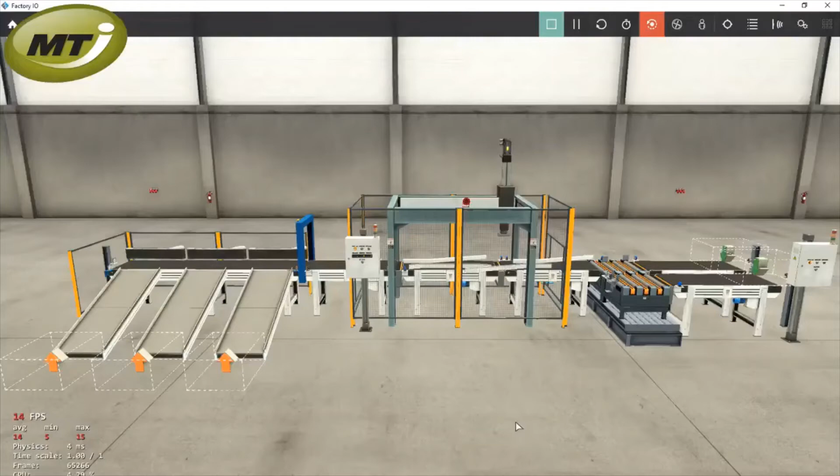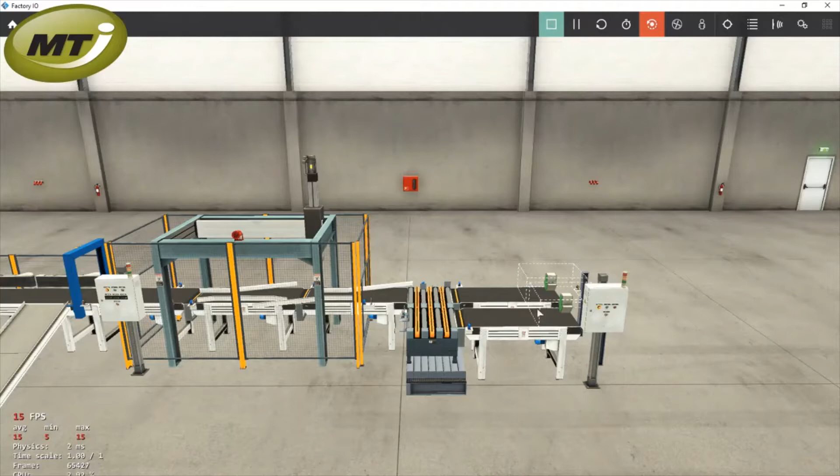To start off my final project, I'm going to give you a brief rundown of what my project does. So right here we're going to be emitting the bases for it, and they'll slide all the way up to here, and this will produce lids, and they'll all slide right here, and they'll stop right here, and they'll slide over. That way they're right behind each other, so when they come in here, it'll be nice and easy for this thing to pick up the lid and stack it on top of the base.

Then once it comes out of there, it will slide down over here, and this vision sensor will sense the colors. And once it sees a certain number that the color represents, it'll smack it down here, and then we'll keep track of how many we got with our counters right here.

But before we start up, I'm going to go over the owner's manual with you real quick, which is right here. So the very first time you start this machine, you're going to want to make sure that the belts are completely cleared and that none of the E-stops are pressed. And if both those items are checked, you can then come and press start on either the control panels or the HMI, and it'll start running.

Now if you press stop while it's running, the machine will come to a stop, and to be able to start it back up again, you'll have to clear off all the belts and press reset program, and then you should be able to hit start on any of the 3 buttons, and it'll start back up.

Now if you hit either of the E-stops, the alarm will come on, and so will 2 red lights. And to get that alarm to shut off right away if it annoys you too much, which annoys me a lot, you can come over and hit the reset program button, and it'll shut off right away. But just because you hit that does not mean it'll start back up again. You will now have to clear all of the stuff off the conveyors once again, and hit start, and it'll start back up like it should.

Now before we go over to alarms, we'll just come back and show you how the machine runs real quick. Now we're back over here, we'll come hit start. So we'll let that base slide right on through. It senses that sensor, the lid will come over. And now once this base reaches over here, these will come in now. That will be a continued process.

And once both these sensors are sensed, they'll pick it up and slide it on over here. And now since it's green, it'll come down the middle one. And it'll just keep repeating like that. And so now we will go look at the HMI for this.

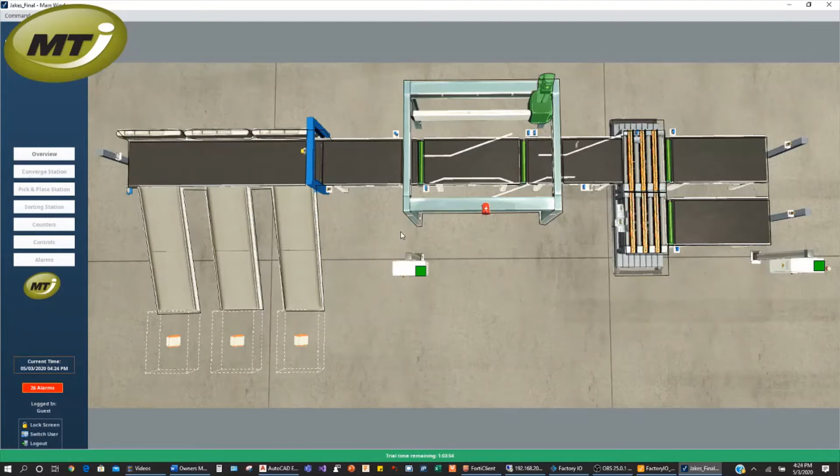The first user I'm going to log in as is guest, because I have 3 different users for this. Each has higher abilities. So as guest here, it's pretty simple. It just lets you know when outputs are running, the lights are on. It's pretty simple. Not a lot you can do, you can't click on any of these or anything.

To get to a higher position, say we want to go to the next one up, which will be operator. You don't get much more to look at. The operator can now just control the machine if they're supposed to. So we can hit stop right here. We come back, look at our program. It is now stopped, and to be able to start it again, we are going to have to clear everything off here.

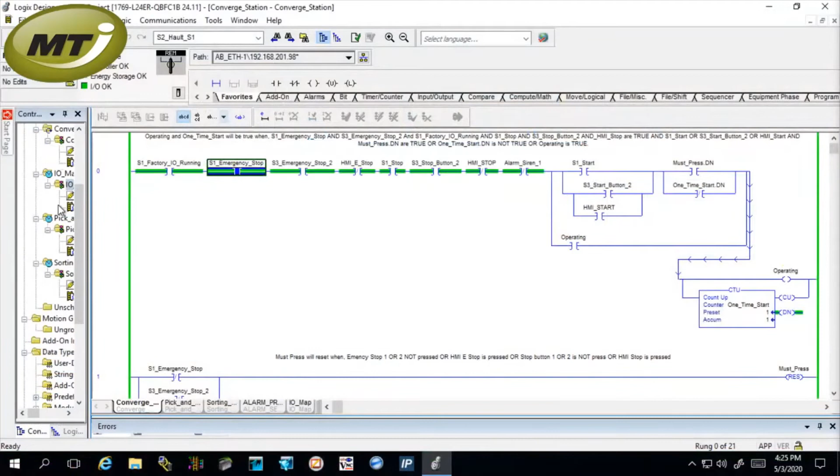I accidentally set one of my alarms off. Stop again, we just come back over here and hit reset program. And now that everything's off there, we will double check by coming over to our programming and look at our alarms. And now some of these sensors, the at-end sensor, I'll show you where that one's at over here. Some of them think that they're still being sensed when nothing's really there, so they get kind of tricky to mess with.

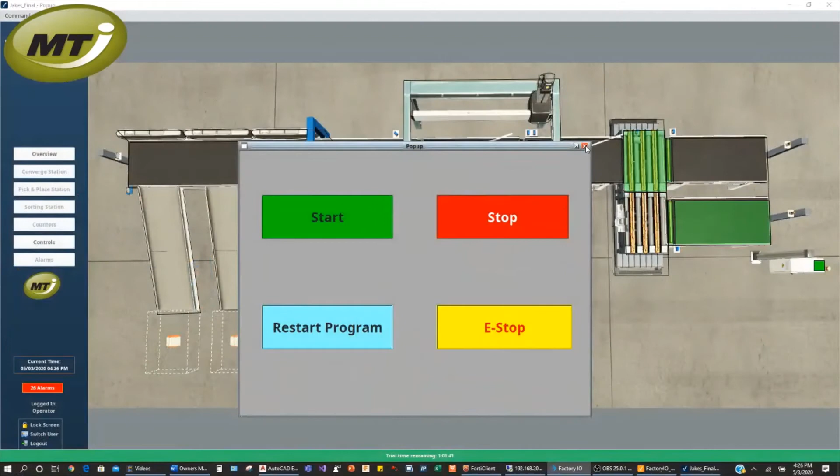So I gotta bring this back up in here. Try to slide in front of that sensor. And now that went away, we can come back here, hit restart program once again, and then start, come back here, and we're back up to running again, just like that. So we'll come back to this, close out of this, and now we'll go to our next user, which is our administrator, which has the power over everything.

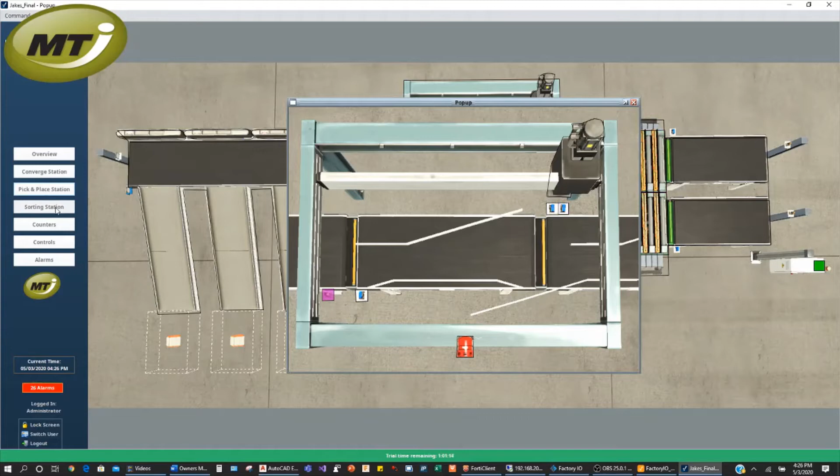So now here we can get a close-up look of when the sensors are actually sensing stuff, and still the outputs. Same thing with pick and place. We can see when the sensors are on or sensing. Same thing with the sorting station. We can still see when the sensors are sensing or not. So close out those three.

And now we will trip an alarm to make sure those are still working. And to trip an alarm, we will not allow this box to reach that. And it's taking a little while because sometimes it takes some time to get there anyway, so it takes about 10 seconds to trip the alarm. And the alarm that's going to trip is this conveyor that's running too long. And now there it has tripped.

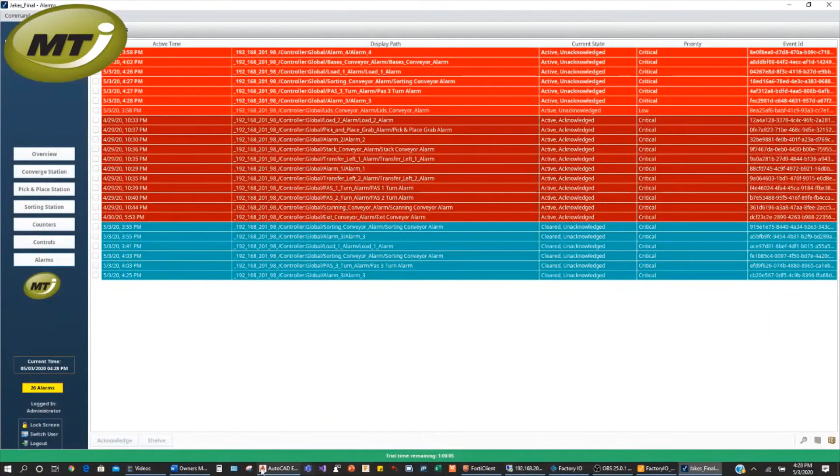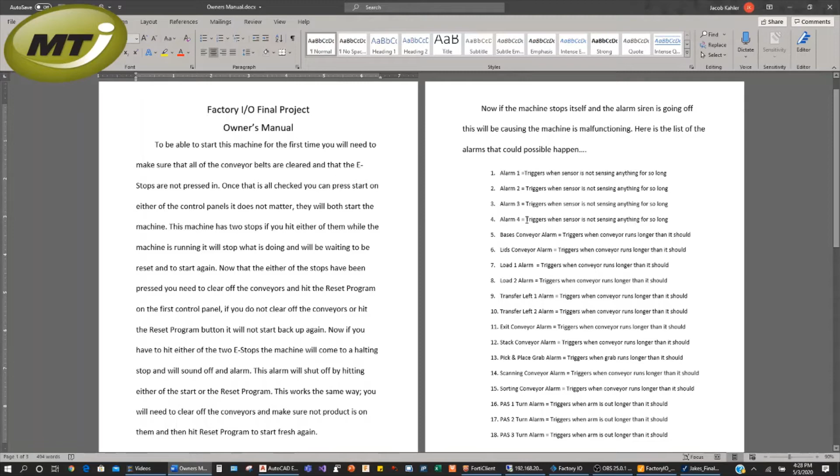So we come back here. We can go look at our alarms now. Should be the sorting conveyor. Oh, it was our alarm before. So to go into more detail, I'm going to shut this alarm off for you. So if we go into more detail about our alarms, these first alarms, they go off when nothing has been sensed for so long, and then the rest of them are just conveyor alarms that will go off when they are running longer than they should be.

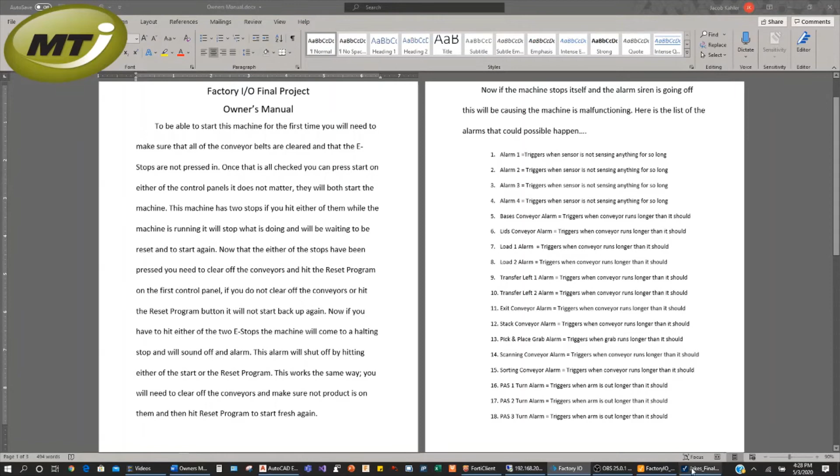And now, if we go back into here, go back to controls, we will come back over here, clear everything off the table. Try to get the ones on the inside there. And we'll come back here, reset my program. And as you can see, the latency, that problem we run into every once in a while, that sensor still thinks it's being sensed, so we'll have to go mess with it for a quick second. There we go, now you can see it cleared out of there. So come back to here, hit restart our program once again, start it up, come back here, and now we are operating again.

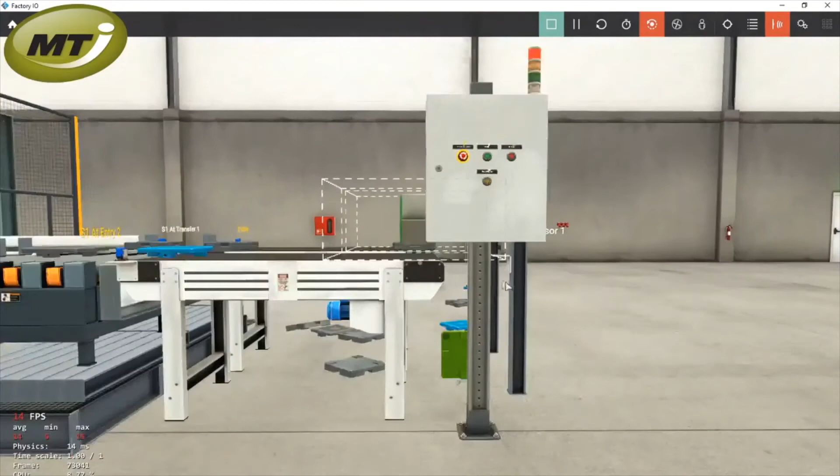And so now if I hit the E-stop while it's carrying that, it will drop it, sound the alarm, that will lower. Come over here, so I have to listen to that, hit restart, hit reset, hit restart, oh that's because the E-stop's pressed in, my bad. Pull it back out, click restart, now it's off.

And when you clear these, go kind of slow, otherwise the latency won't pick it up. I get those parts out of the inside of there. And then we'll come back and double check on our program over here, make sure that none of these sensors are sensing, because if they are, or aren't sensing, I should say, the program will not start back up again. So once that's done, we'll come back over here, hit the restart button, and hit start. Just like nothing happened once again.

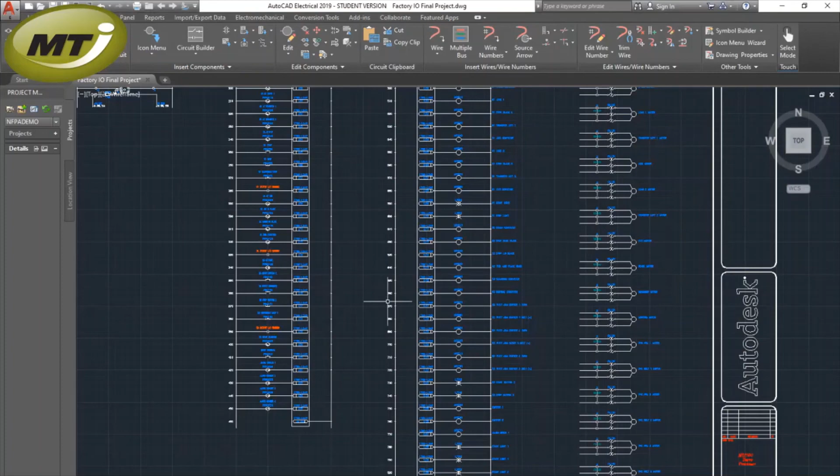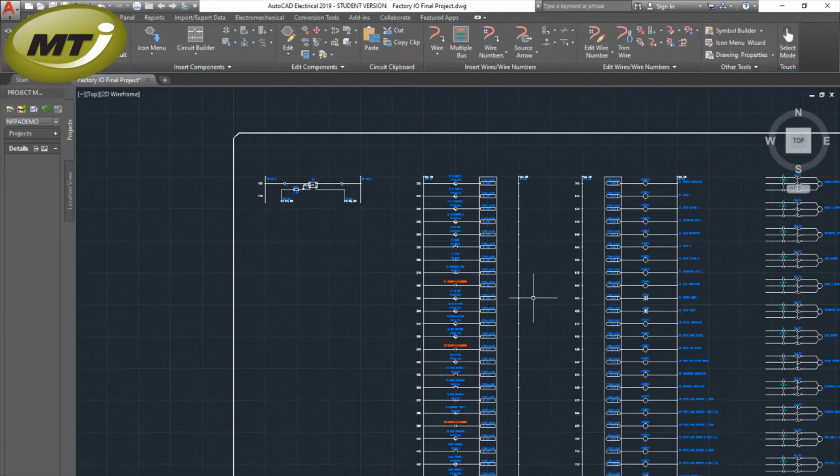And now for my AutoCAD. This is my power supply drawing I used, just off one of our old drawings. And this is my inputs, which we don't have that many on our PLC, but let's pretend like we do. And then for my outputs, I just use motor control contacts. Besides the lights, everything else is motor control contacts because all the conveyors are motors. The lights, you use the light symbol.